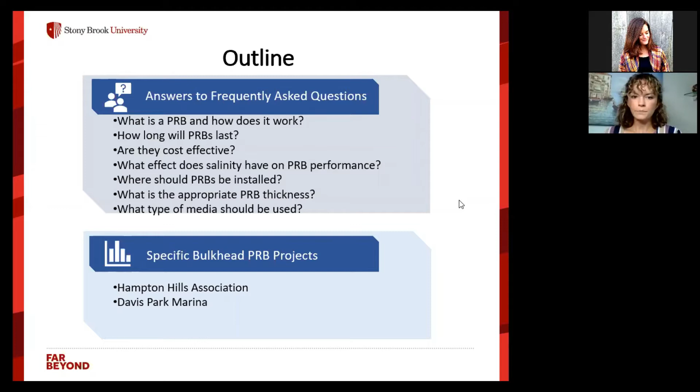So first, what is a PRB and how does it work? Well, groundwater nitrogen has various sources, including wastewater, fertilizers, and products of the fossil fuel combustion that end up in our precipitation. And groundwater moves towards the shoreline and eventually vents into the surface water in a process called submarine groundwater discharge. This groundwater discharge has been identified as a major source of nitrogen to surface waters. Surface water nitrogen pollution is directly related to the occurrence of algae blooms and other water quality problems.

Innovative solutions are needed to reduce nitrogen loading to coastal water bodies, and a promising strategy is permeable reactive barriers installed close to the shoreline to treat contaminated groundwater before it discharges into surface waters. The unique thing about PRBs is that they can treat nitrogen derived from all of the major sources, including septic-derived, agriculture fertilizers, and atmospheric deposition. As long as it's in the form called nitrate when it reaches the barrier, it can treat nitrogen from all of those sources.

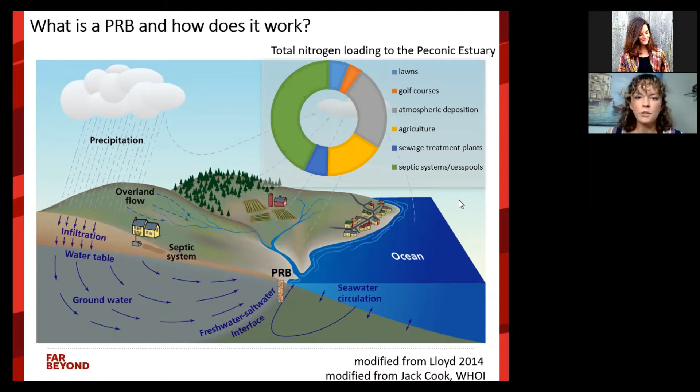Permeable reactive barriers are a type of passive groundwater treatment. The PRB intercepts contaminated water, and through a series of microbially mediated reactions, the water is treated. The microbes that I'm talking about all exist naturally in the soil, so the key is to engineer the system to provide the right conditions so that microbes can do what they do naturally.

And the reactive media within the barrier is typically wood chips mixed with either gravel or sand. This coarse media is more permeable than surrounding soil, which promotes water flow through the treatment zone. There is extensive research on PRBs, and they have been successfully used for groundwater nitrate remediation.

There are several forms of nitrogen, and under certain circumstances, some forms are considered contaminants, while others are considered completely safe. Ammonium and nitrate are nutrients for all living things, and when they're found in excessively high concentrations, they're considered drinking water and surface water contaminants. The PRB is particularly designed to treat nitrate. So it first relies on microbes converting ammonium to nitrate before that nitrogen-rich water even reaches the barrier. Nitrate must be present for the barrier to work.

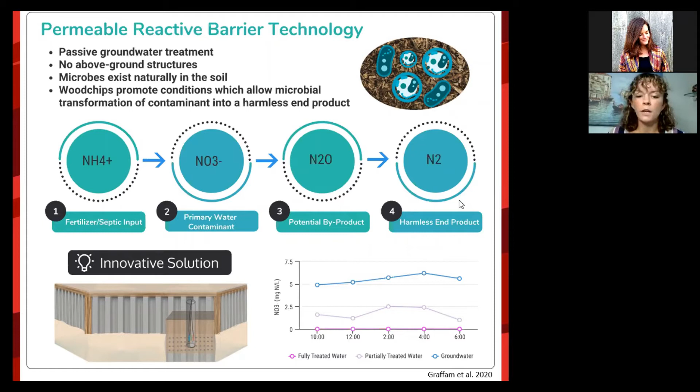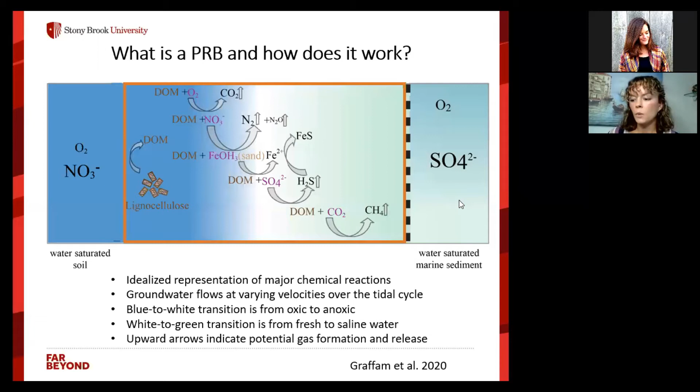The carbon is broken down and consumed by microbes over time, and this process drives down the oxygen concentration. That's when microbes called denitrifiers kick into action and start using nitrate and converting it into nitrogen gas through a reaction called denitrification. The PRB is engineered to perform those first two reactions really well. However, if nitrate is completely removed, there are microbes that can start to shift into performing other reactions that are shown here, and these can lead to some unwanted gas formation and release. So the design process is always aimed at minimizing those unwanted reactions.

These scientists measured organic carbon content and found that 80% of carbon was still there after 15 years, so less than 1.5% of carbon was used per year. This means that even if only half of the carbon available was able to be used by the microbes, the PRB would exceed 30 years lifetime without any maintenance.

This study, however, was done on a freshwater PRB, and PRBs installed very close to the shoreline, such as those behind bulkheads, may experience some seawater intrusion due to tidally induced water flow. Under these conditions, alternative reactions that I mentioned in the previous slide can occur, and this may decrease the PRB lifetime, but an effective design, as I mentioned, can minimize these reactions.

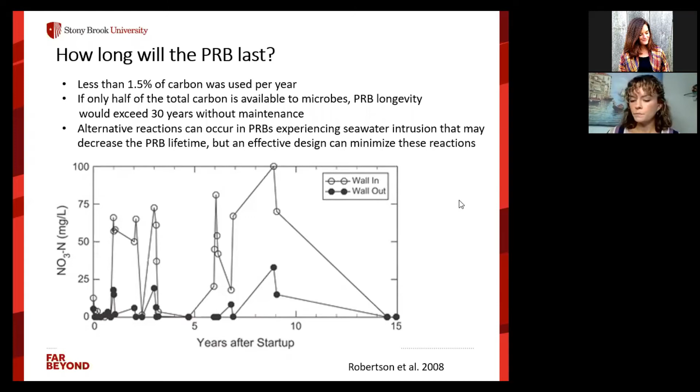Since bulkhead PRBs can experience seawater intrusion, we did a lab experiment to test whether the presence of seawater impacts nitrogen removal. We had 12 PRB columns and 3 different salinity treatments, which were freshwater, low salinity, and high salinity. I took samples over the course of 2 weeks, and I found that all treatments removed greater than 95% nitrate on average, and there was no significant negative salinity effect on nitrate removal.

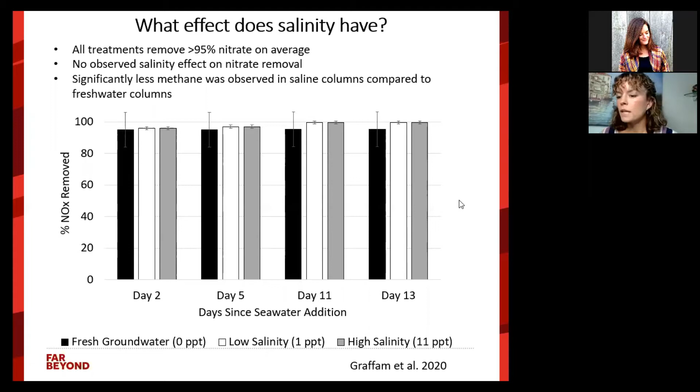We actually observed significantly less methane in saline columns compared to freshwater columns, which was an interesting result that I'll talk about a little bit later. So in the same experiment, we tested this PRB column effluent for the chemical signs of alternative reactions that I mentioned earlier. And we found significantly less methane in saline columns compared to freshwater columns, which suggests that seawater can actually have a protective effect against the release of methane, which is a potent greenhouse gas.

We also found that sulfide concentration increased slightly with increasing salinity. And sulfide is that chemical that smells like rotten eggs, and sometimes you can smell it at low tide in marshy areas. We also found that some iron sulfide minerals precipitated, and this decreased the release of free sulfide.

So in this experiment, we found that all sulfide values were well below typical marine pore water values. And this was a very promising result. And again, minimizing these alternative reactions is always the goal when designing the PRB.

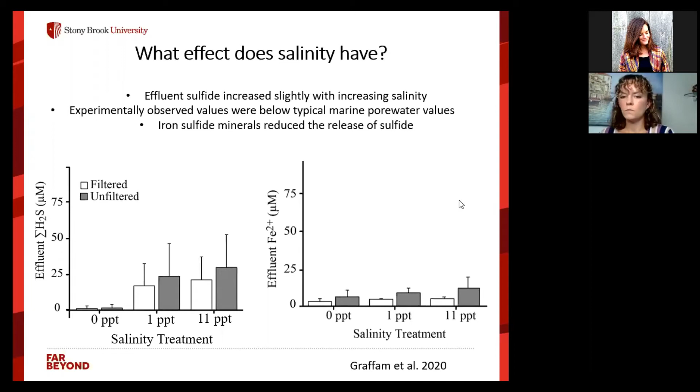A really important factor is determining a suitable location for a PRB. Denitrifying PRBs will be best suited for areas with high groundwater nitrate concentrations and appreciable groundwater discharge through permeable sediments. Areas with no other natural nutrient removal mechanism will be ideal locations for the PRB. And also, we want to install them near shorelines adjacent to impaired water bodies.

Typically, we want to target shorelines with groundwater travel time on the scale of decades, because the PRB will also last for several decades. And Suffolk County has already identified possible areas for advanced treatment and prioritized these areas according to land use, residential density, shallow depth to water, and location of impaired water bodies. This is a great starting point to identify areas that would be suitable for PRBs.

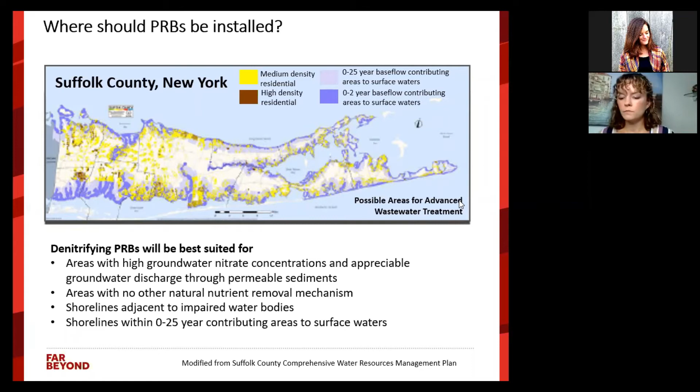And right now, there's a lot of nitrogen being stored in the groundwater as it travels towards the shoreline. So this means that if all residential wastewater infrastructure was updated today, legacy nitrogen would still continue to impact surface water for decades to come.

And while Long Island transitions over the next years and replaces failing wastewater infrastructure, the strategic placement of PRBs can provide more immediate water quality relief. Wastewater infrastructure updates are absolutely critical, and we see PRBs as complementary to this effort since they can be used as a stopgap solution.

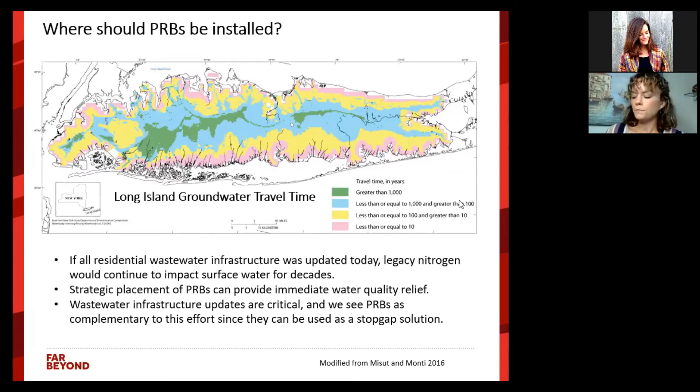Locations that fit the criteria of having a nearby impaired water body and decadal groundwater times may also have existing bulkheads, which are promising potential locations for PRBs. We think that installing PRBs during scheduled replacement of existing protective shoreline infrastructure can be an efficient installation strategy because the excavation machinery is already on site, thus reducing machinery mobilization costs.

Bulkheads can also be easily perforated to control groundwater flow. PRBs would then add a function to structures which currently provide no environmental benefit. And just to be clear, we're not advocating the idea of installing new bulkheads. We're only proposing PRB installation during replacement or possibly retrofitting existing bulkheads.

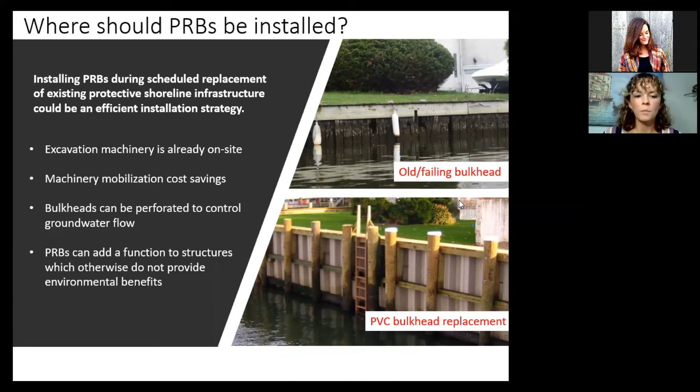And I think it would be useful to have a PRB siting tool for Long Island that includes the existing information which prioritized areas for advanced treatment, and to take it a step further to add data that's relevant for PRBs and perhaps even add information about shoreline infrastructure such as bulkheads. This type of tool could help prioritize suitable PRB locations.

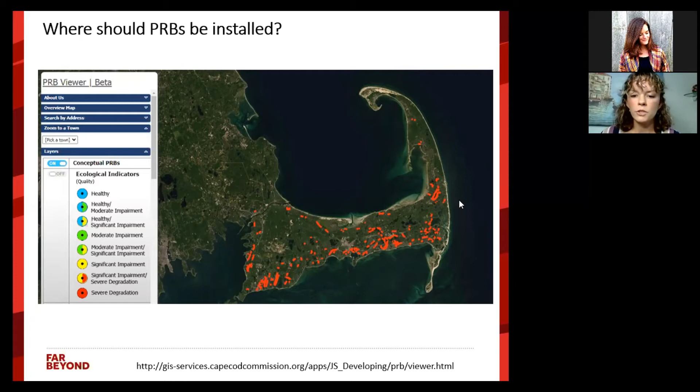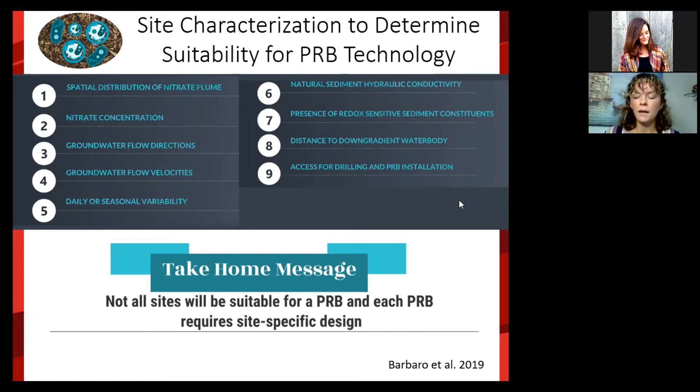The design process involves determining the PRB location and dimensions. Throughout the design process, the goals are to maximize nitrogen removal. At the same time, we want to avoid complete nitrate removal to minimize those unwanted alternative reactions that I mentioned earlier. And of course, we want to minimize installation costs whenever possible.

Some important design considerations for bulkhead PRBs specifically include the tidal influence on water chemistry and groundwater flow and velocity. Also, the density and size of bulkhead holes is important. We want to make the bulkhead porous without compromising the structural integrity of the bulkhead. The media composition is also an important factor, such as the wood chip type and the wood chip to sand or gravel ratio. Ultimately, we come up with one number for PRB thickness, but a lot goes into figuring out that ideal site-specific number.

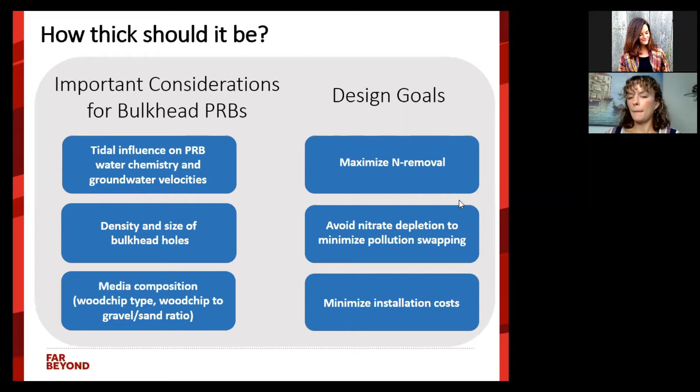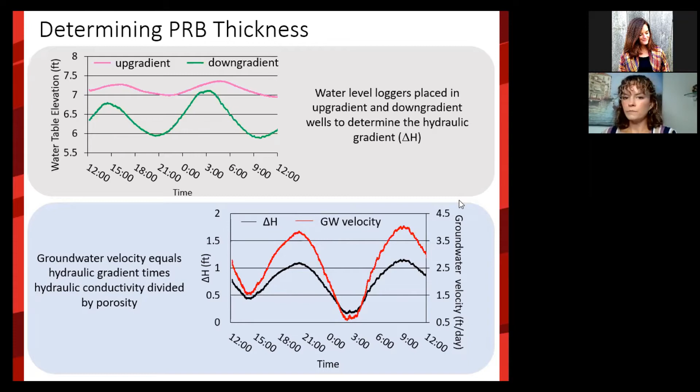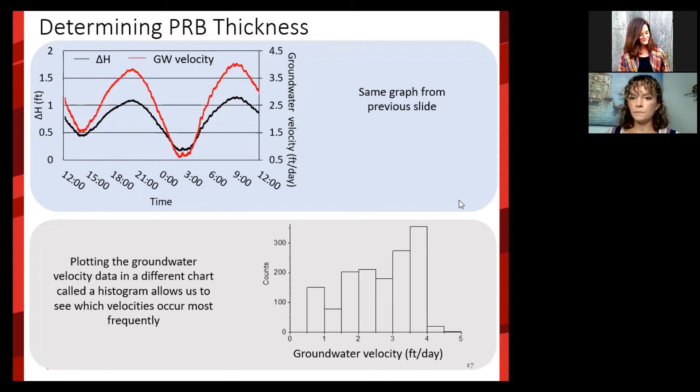It gets a little bit more complicated than that. If it wasn't complicated enough, it gets a little bit more complicated because the wood chip media is actually more permeable than the surrounding soil. So it's important to consider the effect of this high permeability wood chip media, which may draw more water into the media, resulting in increased groundwater speed.

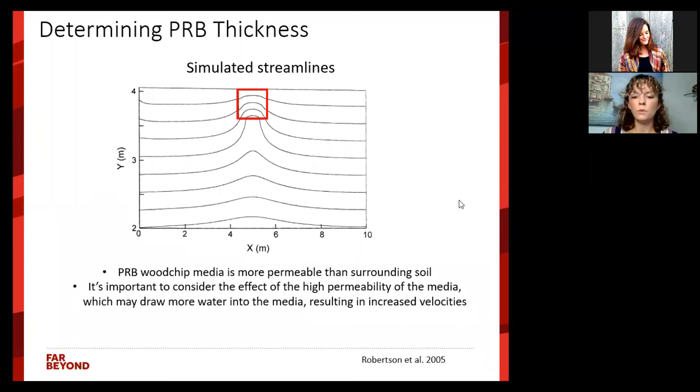Another factor that goes into the design is the fact that microbes require low oxygen conditions to denitrify. However, at high groundwater speeds, such as during low tide, a PRB can get inundated with oxygen-rich groundwater. And this reduces the volume of functioning PRB. And in our PRB column experiment, we observed this phenomenon happening. We used an oxygen sensor on the inner wall of a PRB column.

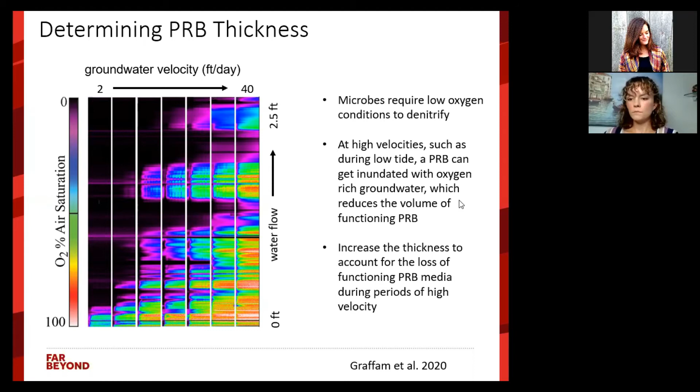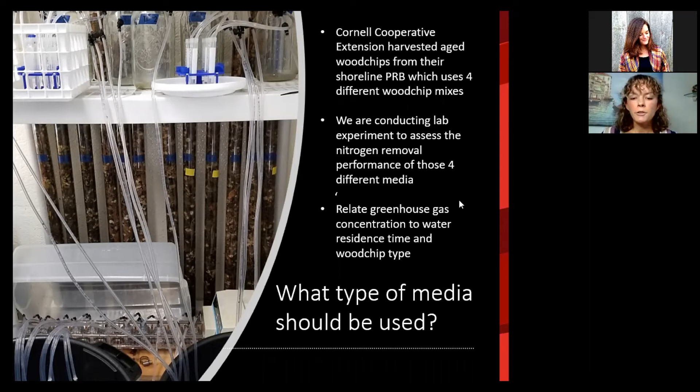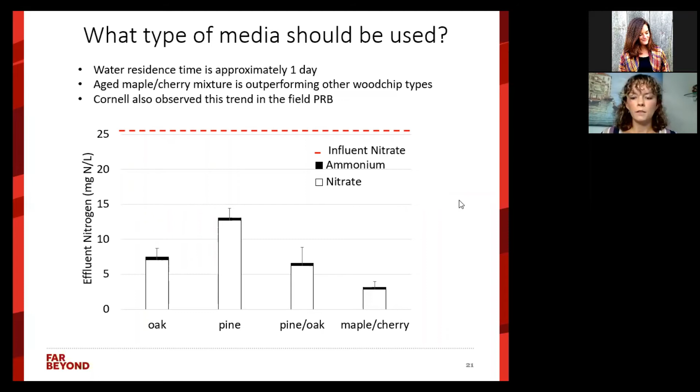This preliminary data suggests that all wood chip types were functioning because there's a difference between the influent and effluent nitrogen values, but there is a trend where pine wood chips removed the least amount of nitrogen, and the maple cherry mixture is outperforming the other wood chip types. This is a very interesting result, and this is consistent with Cornell's field results, which also showed that the maple cherry mixture is performing the best in the field.

After all this information about what goes into siting and designing a PRB, you might be wondering, are they cost effective? Some studies have put a price tag on nitrogen removal, and one Florida study estimated the cost of nitrogen removal is $23 to $51 per pound of nitrogen removed. There are also costs associated with ecosystem damage, and these can be considered as the cost associated with doing nothing and letting the problem get worse.

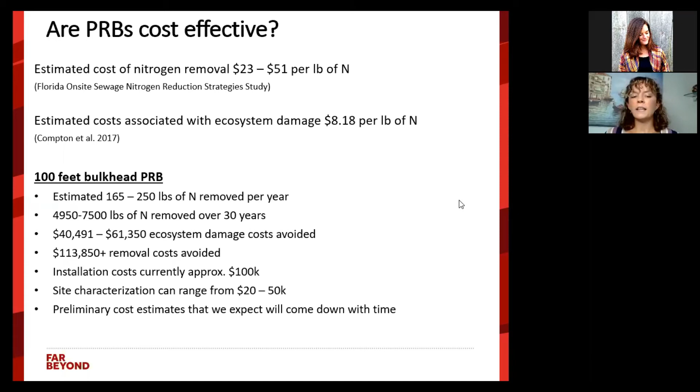If we take a reasonable estimate of how much nitrogen we can remove with a 100-foot bulkhead PRB, then we can calculate a very preliminary cost comparison for the 30-year expected lifetime of the PRB. And although the PRB is expensive upfront, this preliminary cost comparison suggests that it can be a cost-effective approach.

So now I'd like to switch gears and talk about the two specific bulkhead PRB projects that are ongoing. The first project is the Hampton Hills Association Bulkhead PRB. This PRB site was chosen based on land use data, groundwater modeling, and also some previously known groundwater nitrate values.

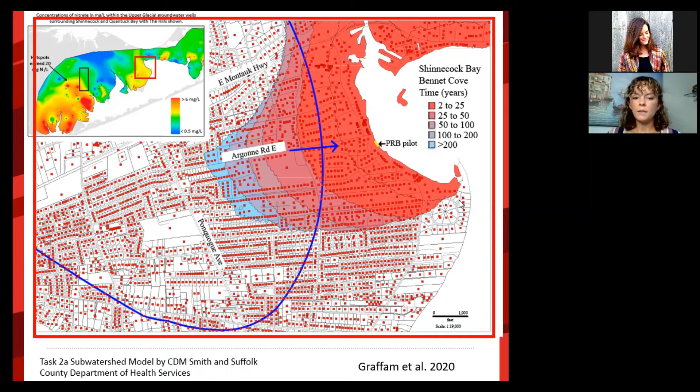The area shown in the top left corner by the small red box is basically what's being shown in the zoomed in larger map. This is a medium density residential area, and groundwater travel times were used from the Task 2A subwatershed model to make this map. And you can see the little yellow mark indicates the pilot PRB location.

So a bulkhead PRB test cell was installed in 2015 by Hampton Hills Association in consultation with Cornell Cooperative Extension. The pilot was approximately 2 meters wide by 2 meters deep and 1 meter thick. A grid of holes was drilled into the below ground portion of the bulkhead sheets to guide water flow through the PRB media. And at this pilot, a perforated pipe was installed in the center of the PRB.

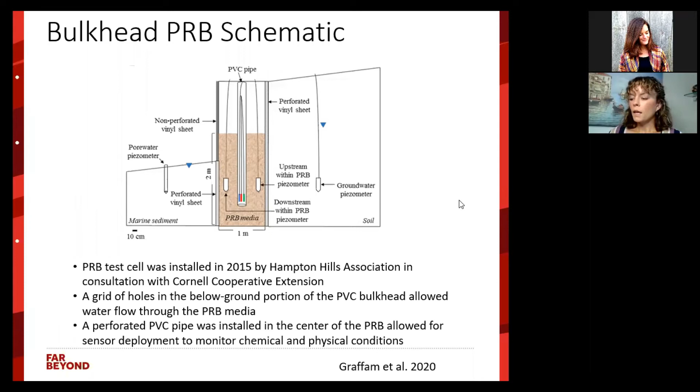And what this data really showed us is that the test cell was a dynamic system with bidirectional water flow and variable flow rates through the tidal cycle. We also monitored nitrogen in the PRB test cell. Here the y-axis is nitrate concentration, and the secondary y-axis is tide height. The x-axis is time. So I'm showing nitrogen concentrations in the groundwater and within the PRB over time.

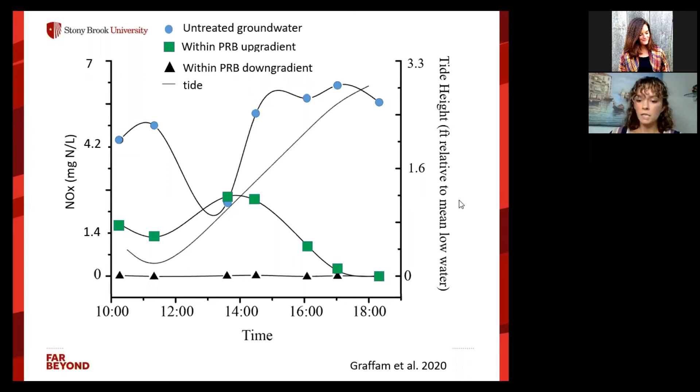Then in 2018, the Hampton Hills Association was awarded a CPF grant from the town of Southampton to install a 100-foot bulkhead PRB based on those promising results from the test cell. And in 2019, paperwork and contracts were finalized and Cornell began site characterization. Then in 2020, the site characterization and PRB design were finalized and construction and installation occurred.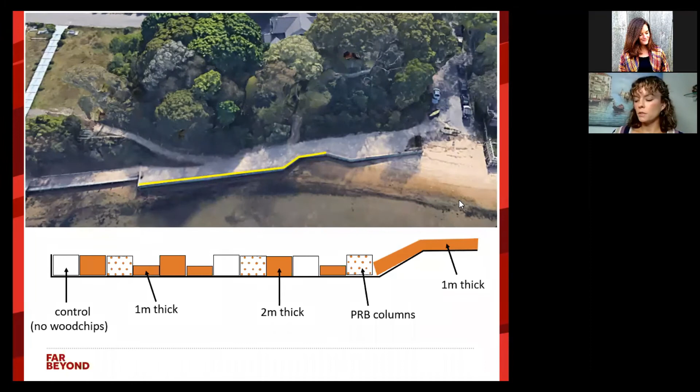So here's a photo from the installation so you can see behind the scenes what was happening. And here is the 2 different thicknesses, the 1 meter and 2 meter thick PRBs. You can see there was a permanent bulkhead installed between each of the 12 treatment cells to ensure that there was no lateral water flow or exchange of water between the treatments.

If there was lateral water flow, that would make it harder to distinguish the effects of each treatment. So these bulkhead returns were installed, and they did increase the cost, but we felt it was worth it for the scientifically rigorous test. Future installations may not require those bulkhead returns, but they also added some structural stability. The bulkhead that you see in the picture on the landward side was temporary, and that was removed after the treatments were installed.

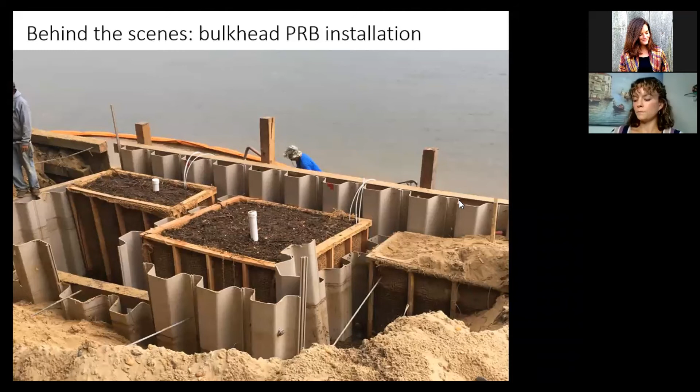Here's another photo from the installation, and this is showing the PRB column setup. You can see from the photo multiple rows of PRB columns and the white pipe sticking out of the center. I just wanted to point that out here because this is where we were able to add continuous loggers, again, so that we could collect a lot of data. And there were also multiple sampling ports installed in each PRB type.

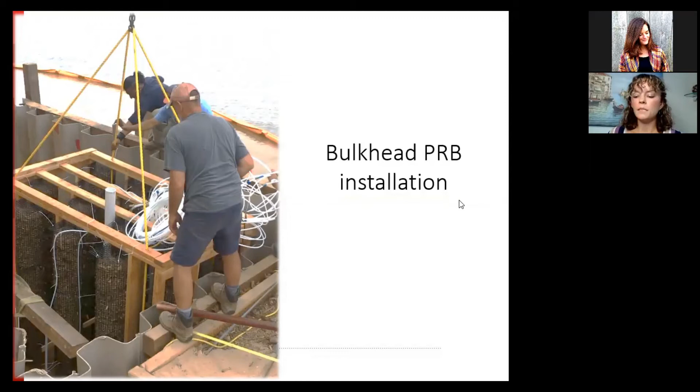Here's a photo from after the PRB installation. So you can see the beach area looks totally normal, and most people don't realize there's a PRB along the bulkhead, although we do have that informational, educational sign for people who are interested in learning more about the project.

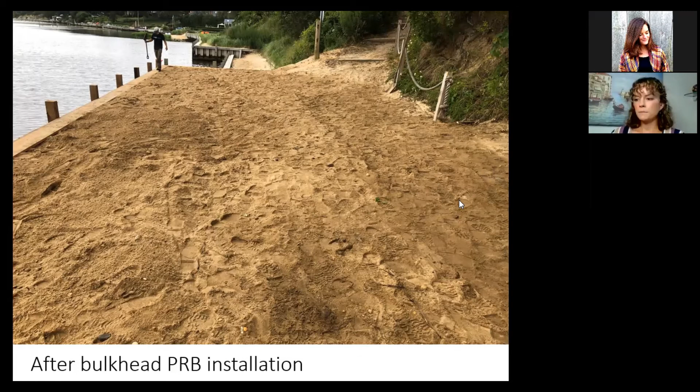So just to go into some of the preliminary data from this site, I mentioned that the white pipes in the middle of each treatment cell were for data logger deployment. Here is some of that preliminary data from a few of the treatment cells. Water level in this graph is on the y-axis and time is on the x-axis. And here the blue line shows the tide water level, and the tide was stationed about 40 feet into the bay. This data set is for 24 hours, and you can see the semi-diurnal tidal pattern, which means there are 2 high tides and 2 low tides per day.

The green, red, and black lines show the water level in the control, 1 meter thick, and column setup. You can see the maximum and minimum water levels in the PRBs slightly lag compared to the tide gauge. And this makes sense because they're onshore, whereas the tide is offshore, so it's experiencing the tide effects before it reaches the PRBs. This also shows that these 3 treatments look very similar. So it looks like they're performing hydraulically similarly.

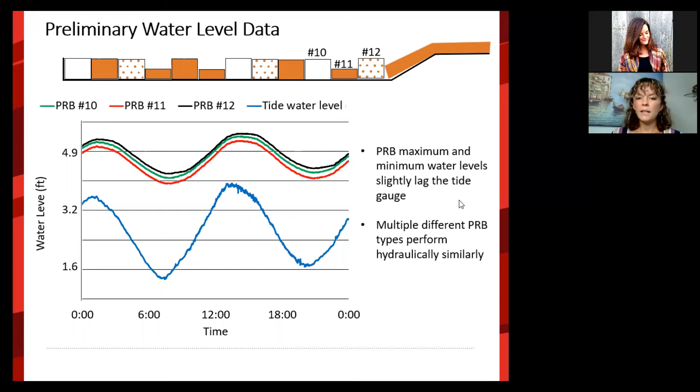In addition to the continuous monitoring, Cornell also started to sample the ports that are up gradient and within the PRBs. However, there's not a full data set yet, so I'm showing data from 1 treatment cell of each PRB type. On the left is a graph of conductivity, which is similar to salinity in that it's a measure of the amount of salt and ions present in water. The black color here shows the up gradient data, and the up gradient sampling ports were those on the landward side of the PRB, whereas the white color shows the down gradient sampling port, which is just after the PRB, and this is representing treated water.

So in regards to the conductivity, the 1 meter thick and the column setup look very similar to the control, and they have very fresh water samples. The 2 meter thick PRB has slightly higher conductivity than the other PRB types. The down gradient samples specifically have higher salinity than the other PRB types. And this could be suggesting that there is some salty water getting into the PRB.

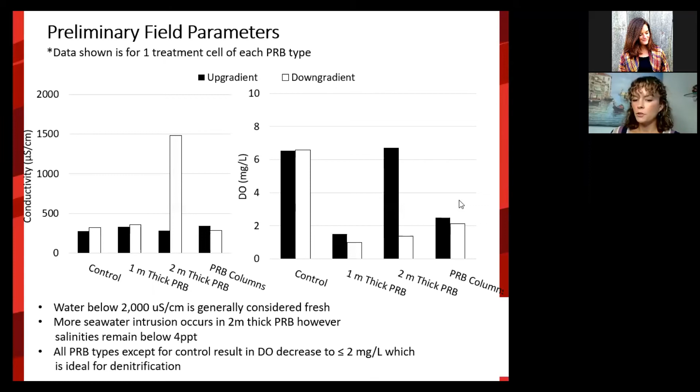Here's some of the preliminary nitrate data collected from one of each type of treatment. There are a few caveats that I'd like to mention first, which is that this data was collected with a nitrate sensor, which has a method detection limit in the range of 1 to 3 milligrams per liter. Compared to the traditional way of measuring nitrate in the lab with a nutrient autoanalyzer, that detection limit can get to less than 0.1 milligram per liter. So this sensor has a higher detection limit than the lab equipment that would typically be used.

The sensor is great for screening purposes though, since it's portable and it's fairly inexpensive. However, when we're dealing with nitrate concentrations below 5 milligrams per liter, we really want that low detection limit, and ultimately we will need to analyze these samples in the lab. Another important point is that the nitrate sensor can only measure freshwater samples. So if we do encounter samples with greater than 2,000 microsiemen conductivity, the nitrate sensor can't be used on those samples.

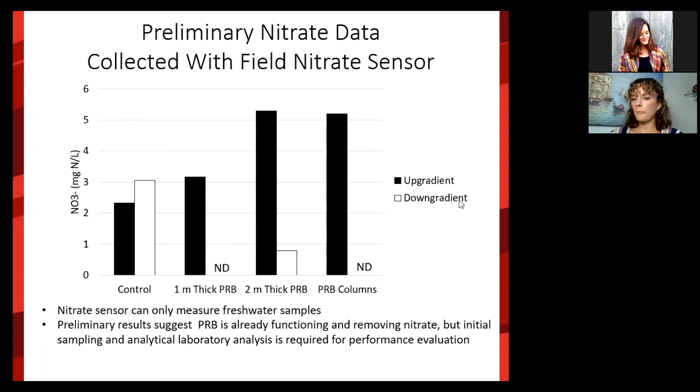Of course, we have next steps. The initial round of sampling will occur soon, and these samples will not be analyzed with the sensor. They'll be analyzed in an ELAP laboratory for nitrate and for other nitrogen components. The resources are available to do the minimum required by the contract to evaluate the PRB performance. But we would like to use this opportunity to expand our understanding of bulkhead PRBs. So the plan is to secure more funding for long-term monitoring and to study the PRB in a scientifically rigorous way, since it is already nicely set up with the replication of each treatment type. It's a great opportunity for research.

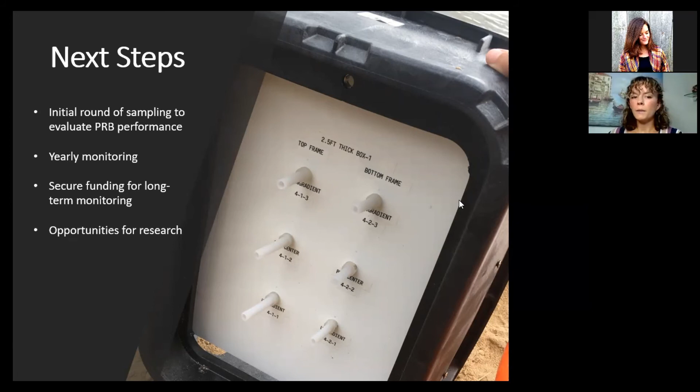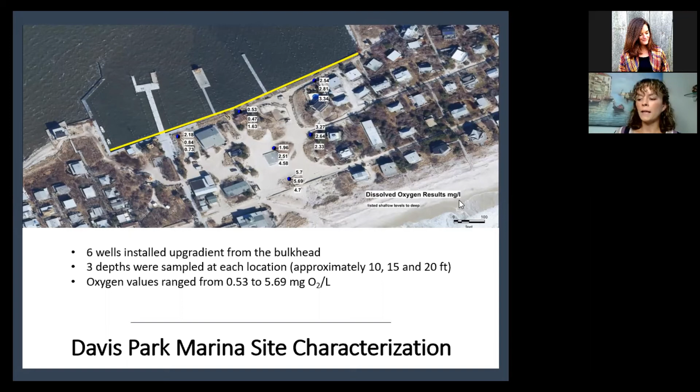I'm not showing it here, but during the initial sampling round, there was also high ammonium found in the well where there was low DO and low nitrate. That's the middle well closest to the bulkhead. This suggests that there is septic-derived nitrogen contributing to the nitrogen pollution problem, but there is not enough oxygen available to convert the ammonium to nitrate. There will likely be another sampling effort in a different season to see if the nitrate values have changed.

So in summary, installation of denitrifying PRBs during replacement of bulkheads is a promising and efficient approach to reduce nitrogen input to coastal waters. PRBs are unique in that they can remove all forms of groundwater nitrate regardless of source. So they can remove nitrogen from fertilizers, septic, and atmospheric deposition as long as that nitrogen shows up to the barrier in the form of nitrate. Nitrogen removal performance is not negatively impacted by saline conditions, but saltwater intrusion can be minimized when the PRB is designed properly.

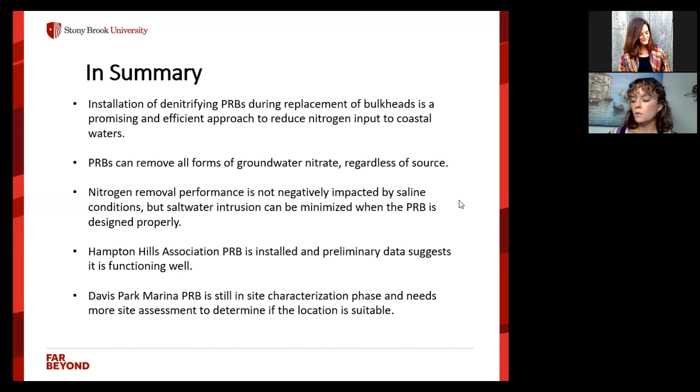The Hampton Hills Association PRB is now fully installed and preliminary data suggests it's functioning well, and we are taking the next step soon on getting the full sampling effort completed. The Davis Park Marina PRB is still in the site characterization phase and needs more site assessment to determine if the location is suitable.